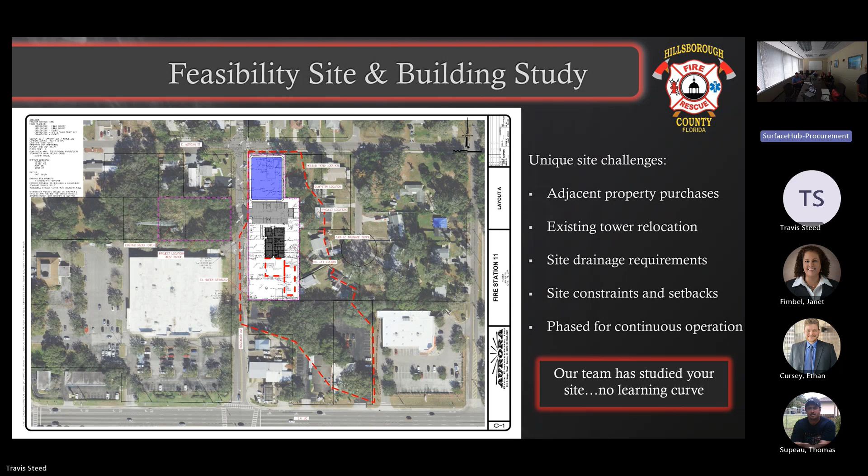With that, Michael, if you want to take the next couple of slides.

One of the major considerations we looked at when doing the feasibility analysis for this property - there's always zoning, transportation, utilities, stormwater. Probably one of the key elements on this site is the stormwater. This is a very old developed part of Brandon. There's literally no stormwater collection systems in the road - everything drains to the road, not really much of a swale, and then goes up to the intersection next to 90 and spreads out to the rest of the properties. This red area represents the drainage basin that literally drains from almost up to 60 to the northwest and winds up coming back onto the site. Part of the road, as you can see here, then turns and comes back to the site.

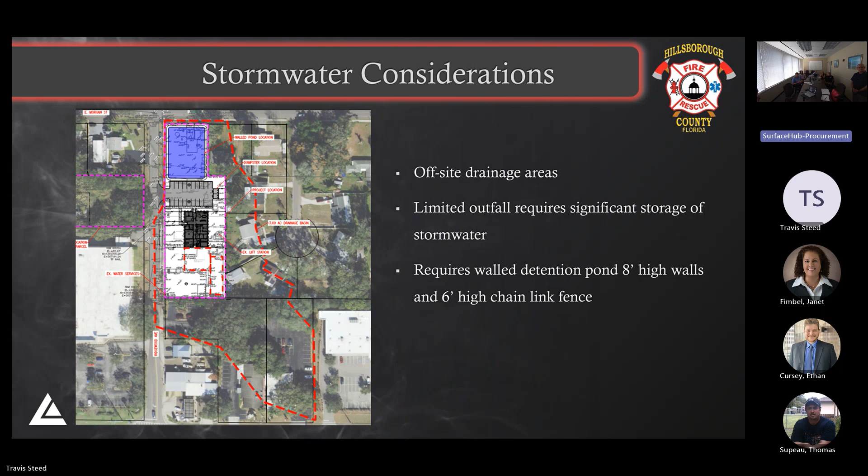So the stormwater pond is basically a walled, very deep, fenced pond. Fortunately for this area, the groundwater is very, very low, so it's the ideal location to put in a walled pond. If this was in an area where groundwater was high, that pond would be three times the size and take out most of your site. We've looked at this - we know that this size pond will work, and we can get that permitted.

Some other issues came in on the site survey - one of the houses went in for rezoning years ago, and the county had them dedicate about 15 feet of their property to right of way. So the property line actually jogs into the site. We believe the county owns that property, the county owns a right of way. You may want to vacate that 15 feet during the process, or maybe nobody is too concerned about it. But that is one of the issues on that site.

Utilities - water and sewer are both available. The lift station on the site is very old; we recommended that be brought up to code and everything routed to a new lift station. The potable water service would likely also need to be upgraded - it's a very old service, same with the fire backflow assembly. It's a very old system, and public utilities may very well also require that to be replaced.

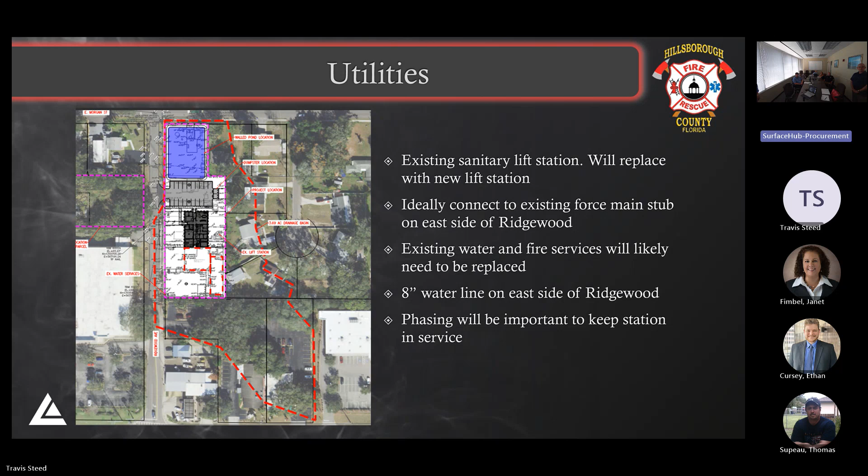Access on the site is straightforward off of Ridgewood. Overall on the site, it has direct access on the west side of the property.

Residential to the east, commercial to the south, and some residential to the north. So there are some 20-foot buffers on the north and east side that'll be required. There's sufficient room, with a little jog, to do the improvements and provide parking. The nice thing is the way it's laid out, it can be built and constructed while leaving the station in service, which is key.

Thank you, Michael. Gio, you want to talk about our plans? Sure. So what we've done here is taken your Armdale fire station as a prototype, and created 3 different layouts that could work on the site using that prototype. This is the first one. It runs east-west, and that would be your new living quarters, connecting to your existing apparatus bay, which is going to be renovated.

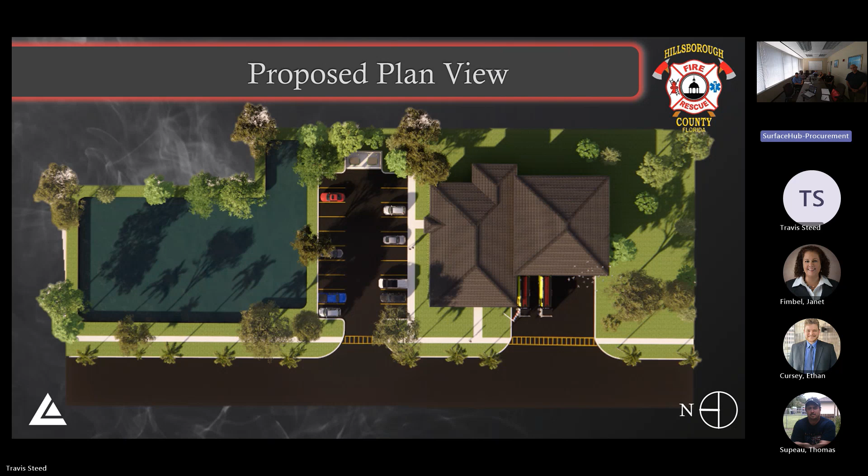We went ahead and modeled all 3 options on your site so you could see what this would look like. You have your existing apparatus bay, new living quarters, parking, pond, and all of the requirements. Just another view of how that would look as a site plan, and a few really cool images so you can picture what this could be.

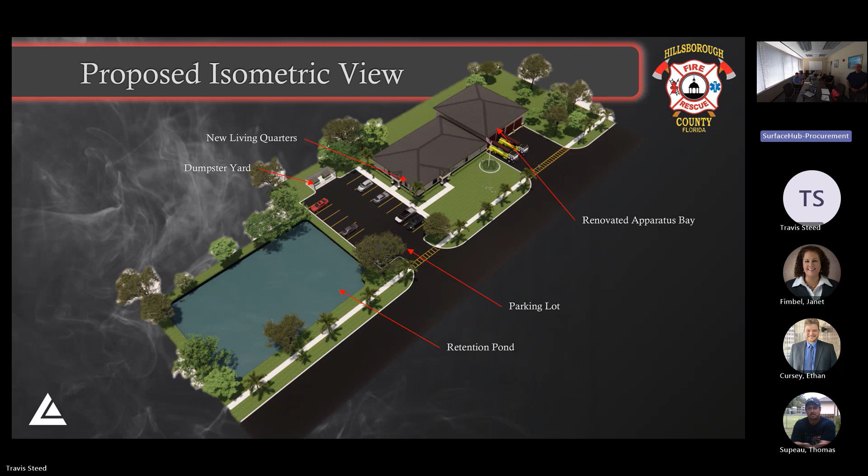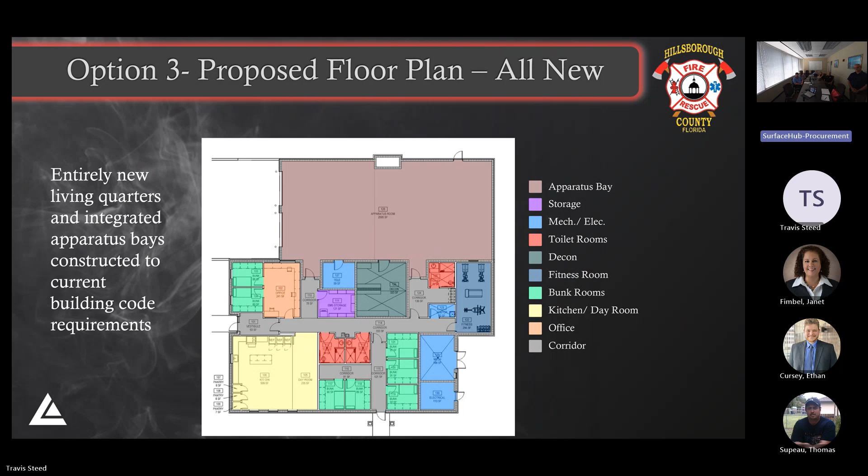For your third option, we took a different approach. We removed your existing apparatus bay and gave you an entirely new project with the living quarters and apparatus bay completely integrated. This would be built to our current building codes, so everything would be up to date and new.

So again, as Gio said, we looked at different options. With this one, one advantage we see, though it's not shown on screen, is the ability for the entire apparatus bay and living quarters to remain in use while you construct the entire new fire station, then bring the old one down at the end and build the parking area.

The phasing works with each of the options. With the other 2 options, there's going to be a period of time where the existing apparatus bay is down for the complete rehaul and structural renovations. During that period we'd use a temporary canopy structure. But with this option, we're looking at what would happen if we could build the whole thing up to current codes, fully from the ground up, and then go back and take the other one down.

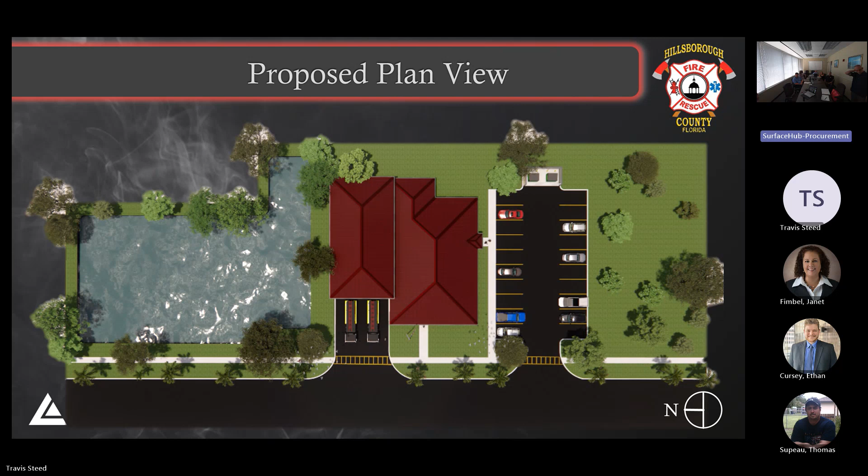So there's a couple of views of what that can look like. Again, we push the apparatus bay back a bit to make sure there's space for the vehicles to park without crossing the right of way.

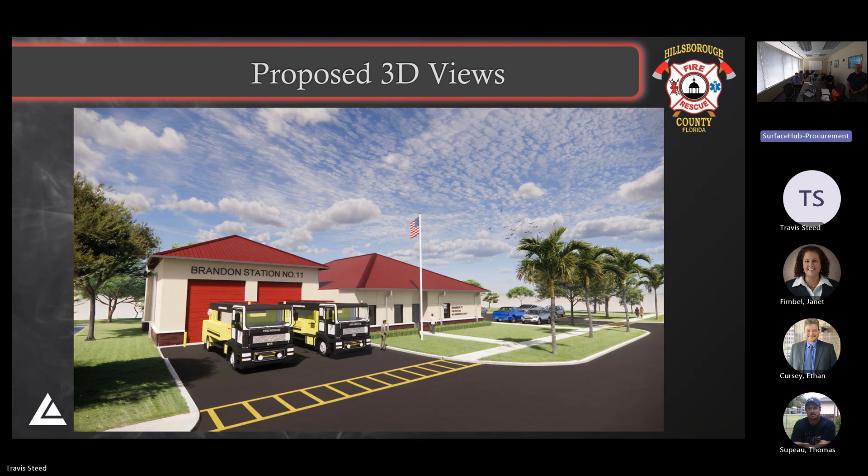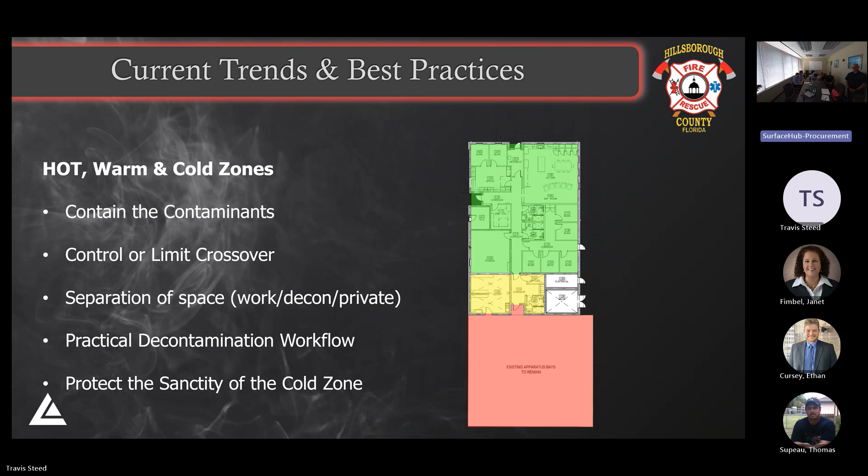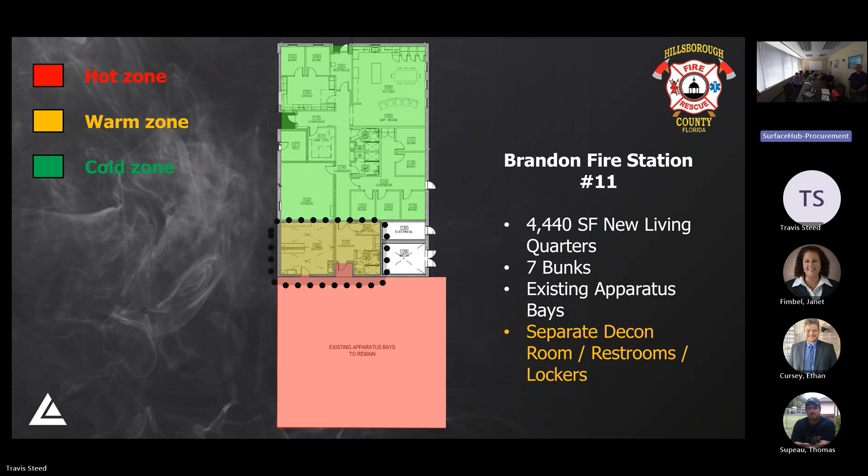We just want to go over a little bit about current trends and best practices. We're aware, we've done this with you several times—we know about the hot, warm, cold zone concept and the real importance of keeping contaminants out of the living quarters. With each of these floor plans, that's been accounted for. Each one has that yellow area, which is a separate decon room, restrooms, and lockers, so all contaminants can be removed before going into the green zone, keeping that area clean and healthy for the firefighters.

And then there's of course full HVAC separation as well, to make sure we're keeping contaminants out of that zone. Just knowing best practices, again—robust materials, adequate storage, making sure everything's maintainable and cleanable, and stands up to the unusual fact that it's a building lived in 24 hours a day. It has to stand up to those conditions, and we can design and build it that way.

So let's talk about time and money. This is the part where we have our little handouts that Lex has, but we really appreciate the chance to work with you guys on the feasibility study. We appreciate you trusting us with that, and we see the value in it.

We see that the leg up that gives us, the time that we've already invested in this. Part of what we're proposing to you today is we can give back the value of that work already done on the feasibility study as part of the Long Associates portion, $35,000 that we've invested in so far. That just is our way of accounting for the fact that we have already started this process. We're really ready to hit the ground running with it.

And we talk about building costs. Part of what you've got on your handout there is a cost estimate. We're looking at about $4.6 million for the building itself, about $1 million in site costs, for a budget range of 5.4 to 5.9 million is what we would anticipate for the size of the building. I feel like that's appropriate.

2 minutes left here. Okay, all right.

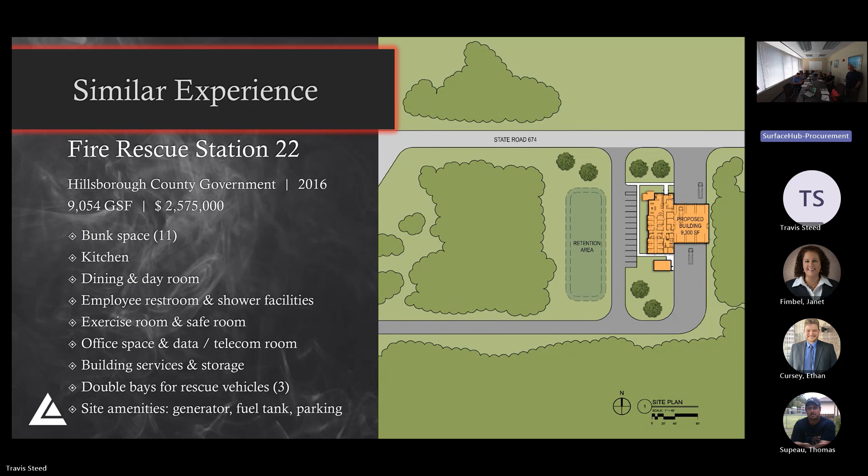The last section is about our ability, which is really just the fact that we've done this before. We did Wimauma Fire Rescue Station 22 back in 2016, 9,000 square feet. Again, each of these is larger than the one we're talking about today, but 2.5 million back in those good old days before COVID, and it's 3 bays for that one. Some photos of how that came out.

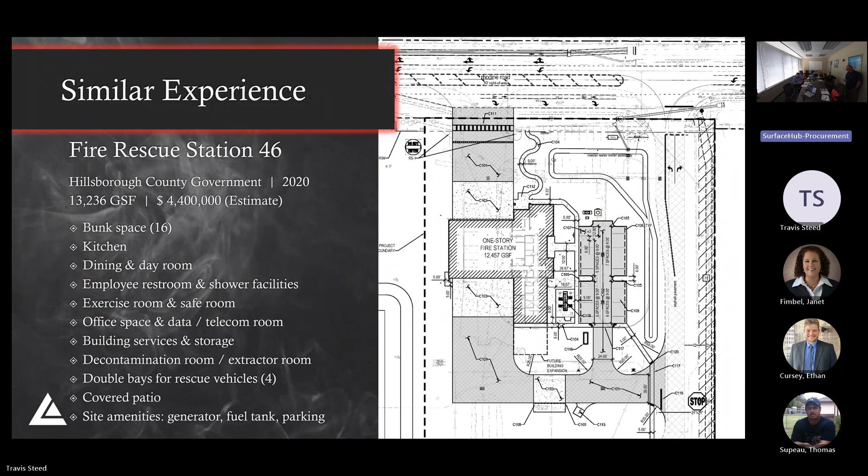And a couple years later, Fire Rescue 32 East Lake, 2018, 11,000 square feet, a little under $4 million. Photos of that. And then Fire Rescue Station 46 on Rhodine Road, 2020, 4.4 million, 13,000 square feet.

So just, we've done this before. We'd love the chance to do it again. Love working with you guys and we'd love to develop that, continue that relationship. Every day you make a commitment to serve, and we're just asking if you let us serve you. With that, we open it up for questions.

So I put together a cost estimate and a schedule run of kind of where we thought it might start. And the cost estimate really is based on the idea that we were keeping the existing apparatus bay and using kind of the current numbers that I'm sure you have, you can justify those same numbers on your current fire stations of what we're seeing. It might be a little more if we demoed the apparatus bay, but the trade really is going to be some cost for the phasing ability of switching that around. And I put a contingency of 8% in there, $400,000 or so. We're going to try and balance some of that.

So our range is 5.4 to just under $6 million or so for this square footage. And then we ran out a schedule here with various times to show that really the site permitting is on the critical path. That's usually always the way it is - we've got to get all the site stuff done first, turned in, reviewed, get all the agency approvals and all of that. So that's pretty accurate with the fact that that would be critical path and they come together appropriately. We could certainly bid and start that process early, reviews and that kind of stuff. We'll have to see with the builder.

So, we are right now using Rhodine as one of our prototype stations. So a question I had is, based on your experience with Rhodine and then any experience since then, are there changes you would have made to Rhodine that you would implement for Brandon? How would you kind of take what you learned from that and roll it into this station?

Trying to think, I mean, the biggest difference is size, scale, and all that stuff - smaller facility. We use a lot of these same things. That was the first one we worked on where we really involved the hot, cold zones and all that stuff. So, I mean, we would use those lessons learned, implementing those same strategies in the station - they seem to work well there.

Okay, our first question would be looking for feedback of, is it working? What isn't working from your perspective? From our perspective, we learned a lot, and again, each of those three was an improvement on the previous one, we felt like, in how they functioned and how they're constructed. And we would like to do that again.

Our first thing would be to sit down and ask a lot of questions about what's working. The biggest difference would be the size.

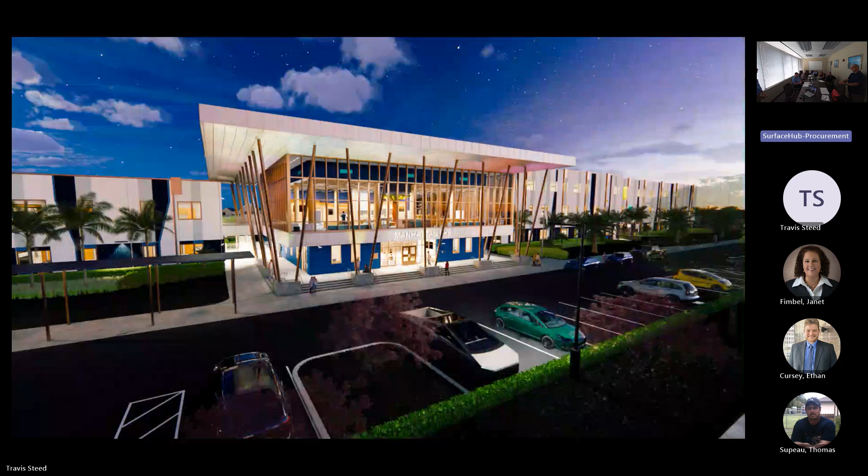Here now, very small site. Help me make sure I understand correctly - in all three of your options, we would keep crews in the existing station during construction, no need to relocate. Correct, the first two options are really just what your RFP spells out, where your apparatus bay stays throughout, and the living quarters stay until the new living quarters are constructed, and then they can be taken down. The tricky part is that while the apparatus bays get the intervention there for structural work, it's going to mean you can't use it for a period of time. But yes, each one would allow it to continue to be in operation the entire time.

We think we can do one where we start right at the edge of the apparatus bay north, which you were illustrating, and they leave that whole thing in place until it is built. I think that approach should be investigated further as possible - it's saving time and money.

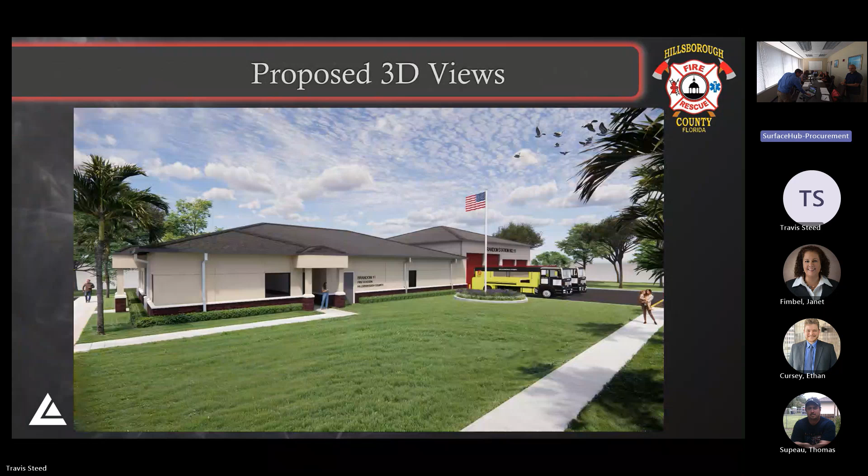Let's go back to the one you introduced with the apparatus bay - so the first two options? We're looking at a two-bay deep station here, right? Two bay deep would work, but if we keep the existing apparatus it's three bay. Right, that's the difference - what we're showing there, based on Armdale, is two that are double deep.

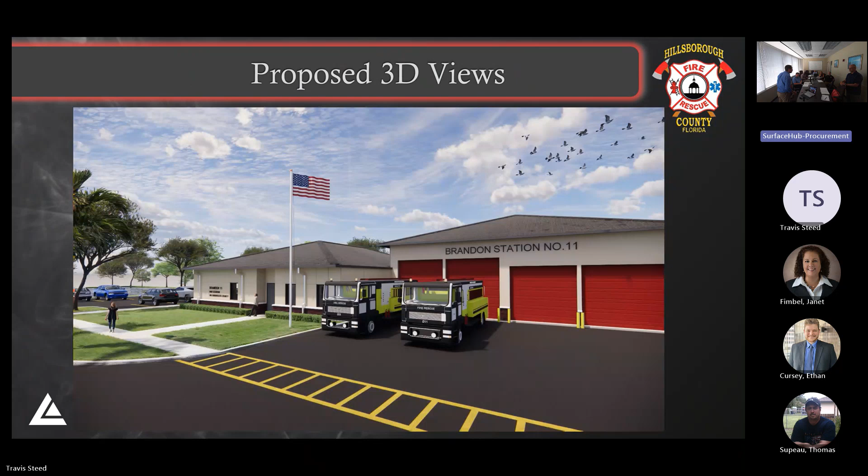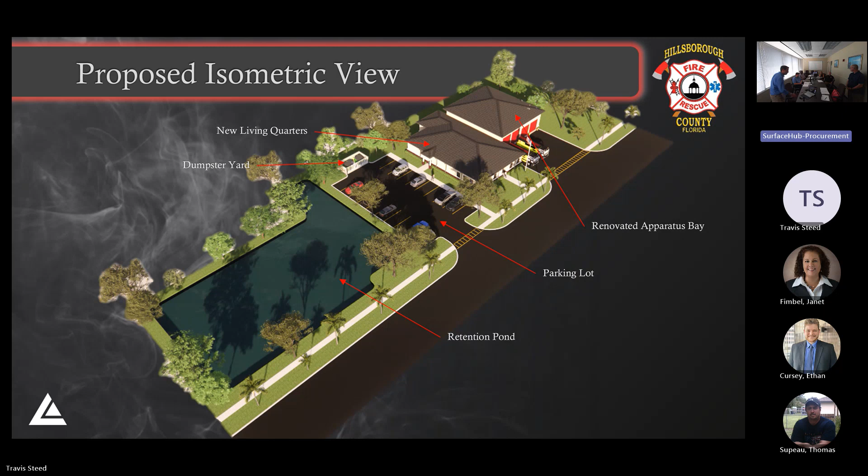We recognize that the big challenge on this site is that you can't pull through. We understand that would be ideal, but that's the constraint. So what is the setback in the back based on that? It's right there - 25 feet, each of these, because we could move slightly over that but we can't go within 25 feet. The buffering was 20 feet in the back, right on the north and east side. So you're going to have trees and hedges, probably a fence.

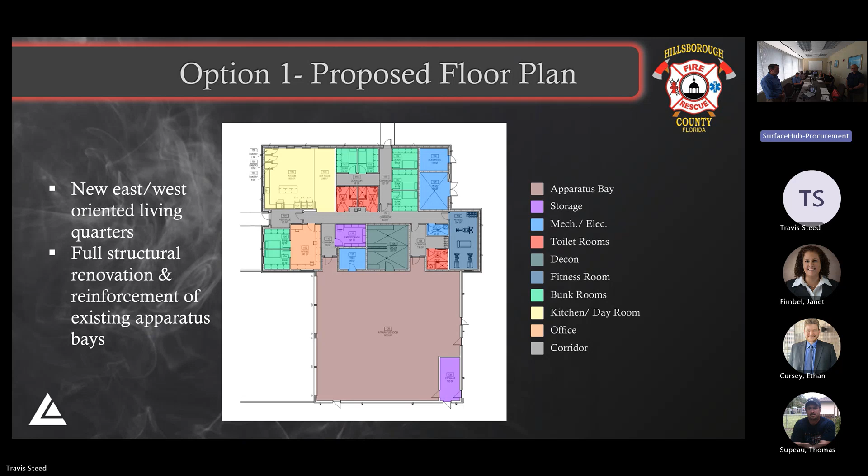Travis, how do you guys use LVT? Yes, all the time, we're using a lot in schools. That's the new trend, to not put VCT anywhere - replace all the VCT with LVT. It was taking a lot of abuse too - middle school I'm doing right now, it takes a lot of abuse. What about PVC flooring? I haven't seen a whole lot of that from a trend standpoint right now. The LVT has been the real trend for us in all the related commercial, school, and government work we do. We're transitioning more away from polished concrete.

Our experience is it's nice in certain applications, but some of our sister agencies have expressed the same feedback, which pushed us to an industrial grade LVT. We've been seeing a lot of that and it's practically bulletproof, so to speak - pretty robust stuff. It has antibacterial properties and all kinds of benefits. We've been using it a lot in media centers, classrooms, all kinds of related spaces in a public setting, especially the last 5 years - it's really taken off. There's definitely challenges with the concrete exposed.

Can you touch on other types of materials that you're seeing used more frequently, just because Chris is always saying they kind of tear through things in all of their stations? How do we make sure we have some longevity? I mean, solid surface materials is the best thing. Like I said with the LVT, I go back to schools because the kids are beating it up really bad, and that's what we're doing there - always trying to find the most durable thing we can do. Again, the LVT is standing up to it, and solid surface does better than laminate where you can do it.